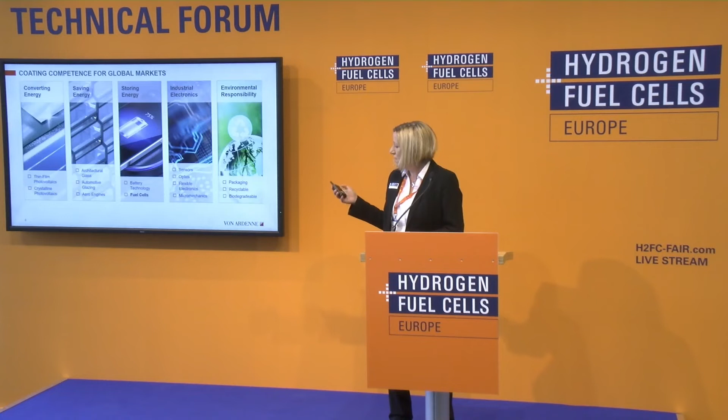My name is Susann Puppe. I'm active in the field of fuel cell and hydrogen applications for several years now, being responsible for sales and business development for von Ardenne. Today I want to give you an introduction into von Ardenne and its industrial equipment solutions and thin film coatings for fuel cell applications.

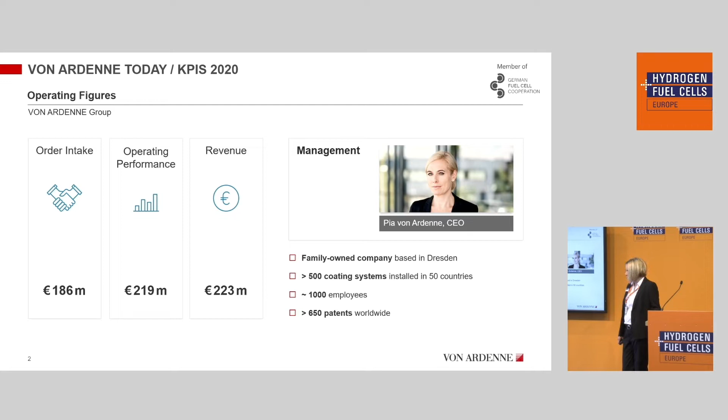The global network of von Ardenne is basically consisting of sales and service subsidiaries located in our major markets or close to key customer sites for fulfilling our service promise. So far, we have sold more than 500 coating systems installed in over 50 countries. We have an export quote of roughly 90–95%.

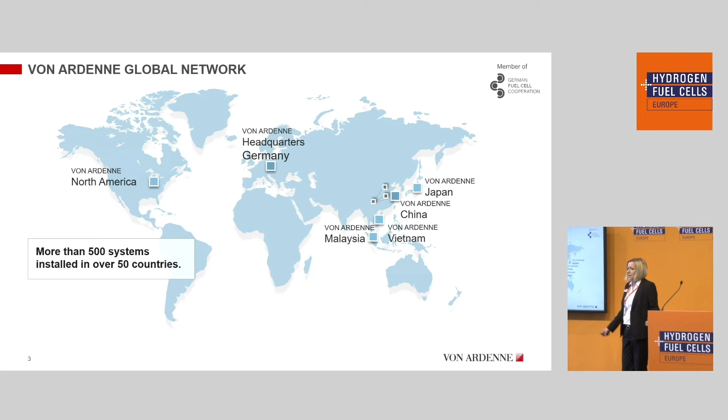So, what exactly are we doing? We are a manufacturer of advanced vacuum coating systems with applications in a very broad range. Very thin coatings means coatings from 1 nanometer to few micrometers thickness, giving surfaces completely new functions. Could be conductive functions, can be passivation functions, decorative, anti-scratch. It's very diverse.

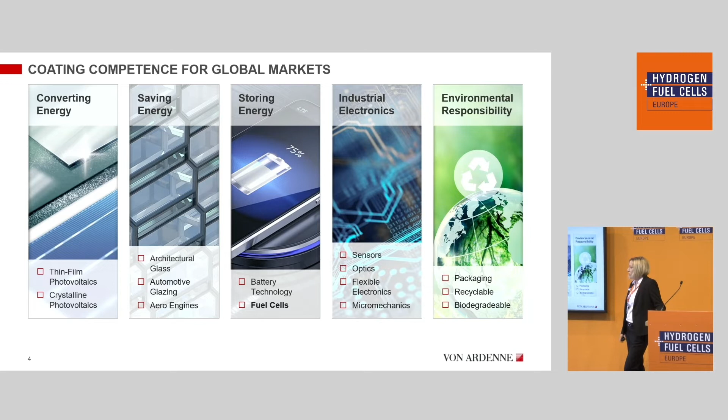That means for covering all these applications just shown, we of course can design and engineer machines that can handle all kinds of substrates. That can be 10 micrometers thick polymer foil only, up to 2 millimeters metal strip, can be very tiny substrates or glass panes up to a length of 6 meters. Applying these functional coatings, we are using 2 core technologies, which we have expertise in for decades now, which is the magnetron sputtering, and the other one is mainly the electron beam evaporation.

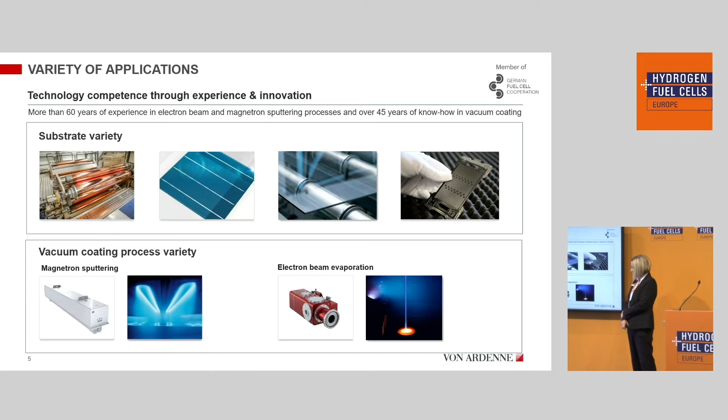We are configuring the machines to all kinds of needs. Could be demand for R&D purpose, for institutes, industrial labs, universities. We offer machines sized for pilot production, or here you can see a mass production machine, in this case a glass coater.

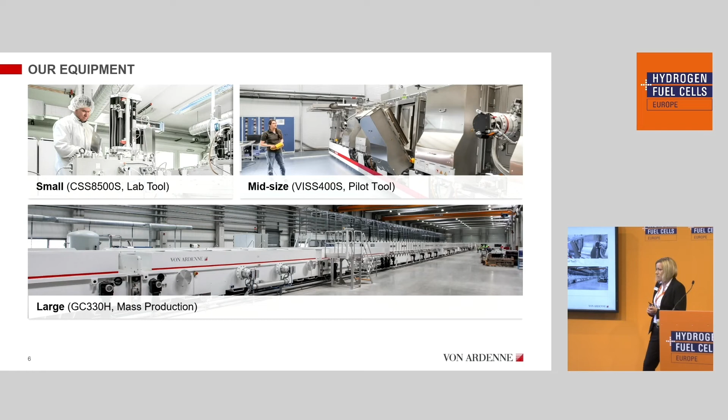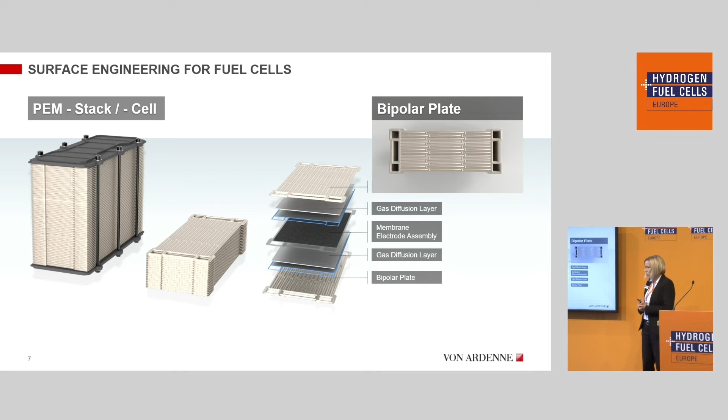Coming to fuel cell application and also for electrolysis, the functional coating our equipment is applying is dedicated to the bipolar plate. In a fuel cell stack, you have around 300 to 400 bipolar plates stacked, depending on the power output the stack in the end would need to perform. Of course, main discussions over the last years have been taken for the PEM fuel cell stack, especially for the metal bipolar plate, but latest trends also show very high interest in functional coatings on other components, also for the electrolysis application, for instance. We can also cover such requests.

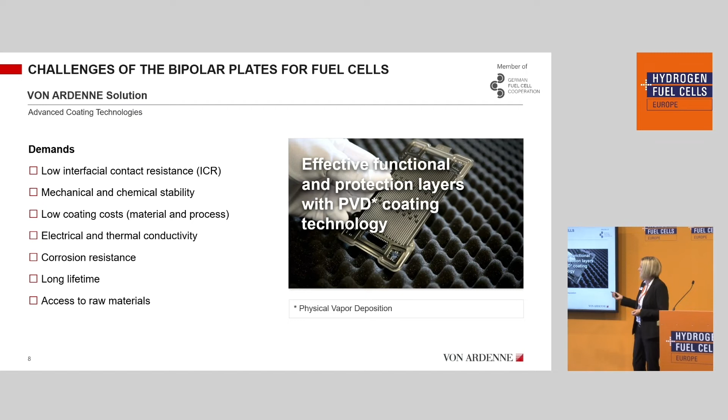So precisely the bipolar plate needs to fulfill certain demands of performance. We need high conductivity, we need mechanical stability, of course, low coating costs are expected, and corrosion resistance, and a long lifetime. Talking about the metal bipolar plate, we do need coatings to actually make the steel or titanium perform exactly these requirements. And this is where our PVD process is coming into the game.

Within our platform of machines, we do cover, again, all demands. We can serve your R&D purpose for fuel cell investigations, up to pilot production, or even high volume production. What is important is the takt time of production, especially for the mass production, and the cost of ownership or the coating costs in the end. With our machines and our solutions, you can easily reach these targets.

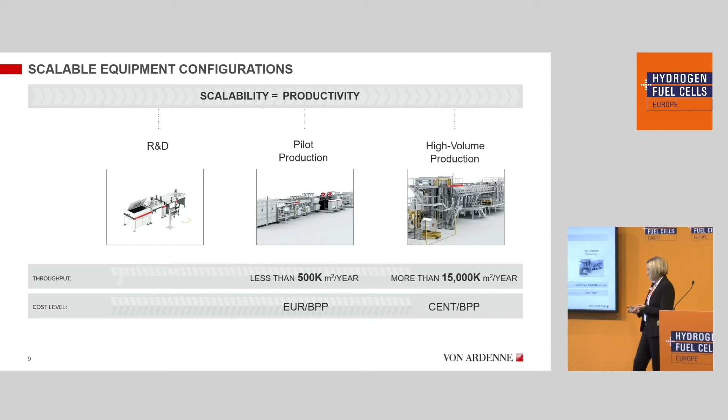Okay, our engineering capacity and coater platform actually gives us a chance to cover two positions in the typical value chain of a metal bipolar plate. It starts with a metal strip coil, of course. And if you're coating single sheets, meaning the readily welded bipolar plate, that's called post-coating. This is done by loading on carriers and then running through the coating process.

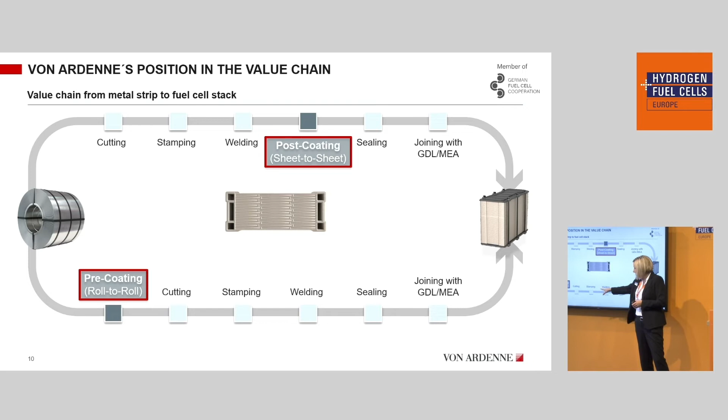Another approach, and basically the economically more feasible version in the long run, is a pre-coating option where you actually coat the coil, and the following steps in the value chain are cutting, stamping, welding afterwards. So now combining these two, the post-coating and the pre-coating of the substrates, and then our two core technologies, electron beam technology and sputtering, you have a very diverse field of machine concepts that are possible to cover your production amounts.

You can see here again R&D, metal strip batch coating, for instance. This is a mass production metal strip coater. These are just examples. It's a wide variety, and we are willing and very able to discuss your certain needs and adjust that.

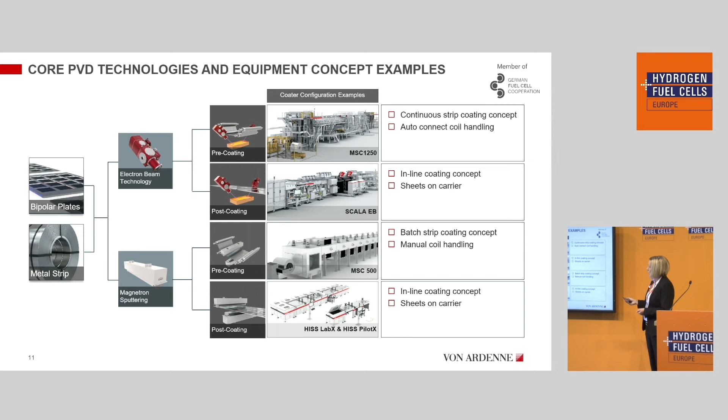Not only are we configuring machines in certain sizes separately, our machines are designed on a modular basis. We can install all kinds of processes you would need, be it any pre-treatment or any post-treatment. If you want to apply one layer or different materials in one row, we will just adapt that and put that in a row of components. And this same machine can actually be upgraded. If you decide to double your productivity later on, we will just apply more components.

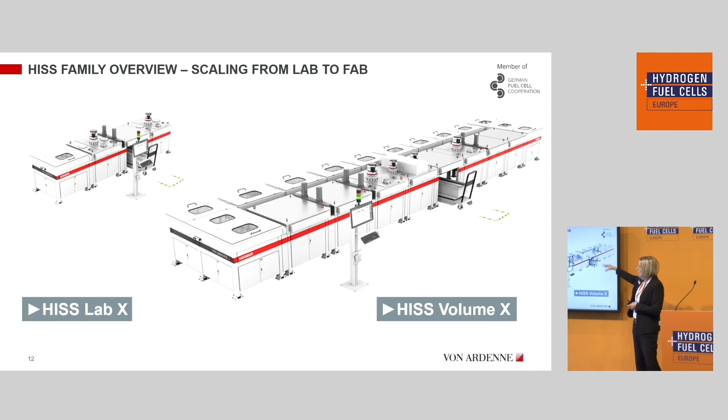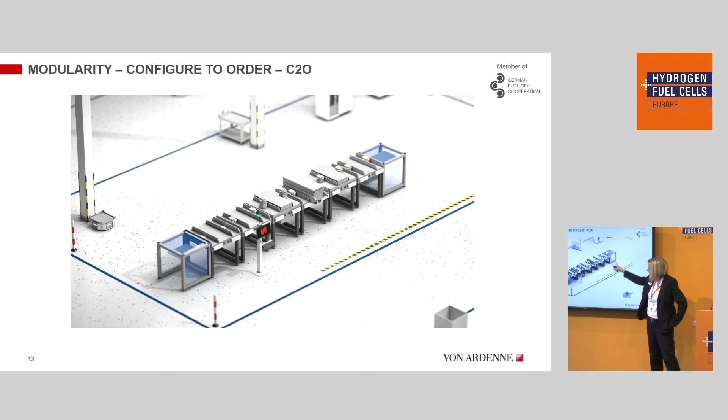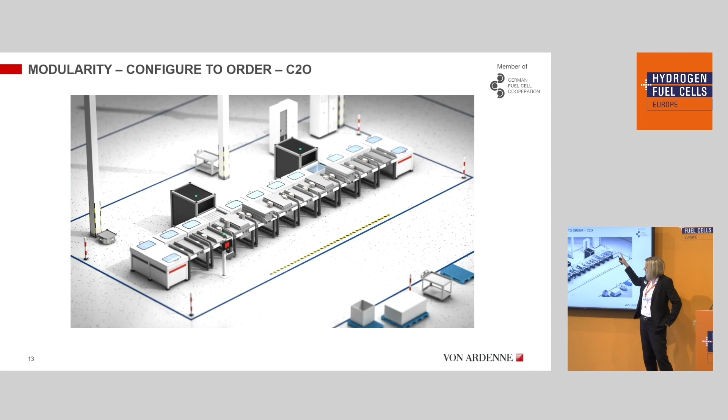So I will just show you a video on this one, it makes it more visible. For instance, you would start with just a one-ended, one-carrier machine, carriers running into the machine, being coated, and running back. So that would be the initial stage for R&D. Then you can combine different components and compartments, working maybe with a magazine solution, front and back end, and it's still the same machine, just extended. And the latest extension version would be fully automated for loading and unloading, plus a carrier return system. So this is complete mass production.

Also in our market, I think we are to a big part in the investigation and qualification phase, and therefore von Ardenne is able to do prototyping with you, do trials with you. We can also scale R&D topics up to industrial production. We do have a pool of lab machines in-house to cover your special requests. You can just approach us, and yeah, we are very willing to have discussions on new approaches.

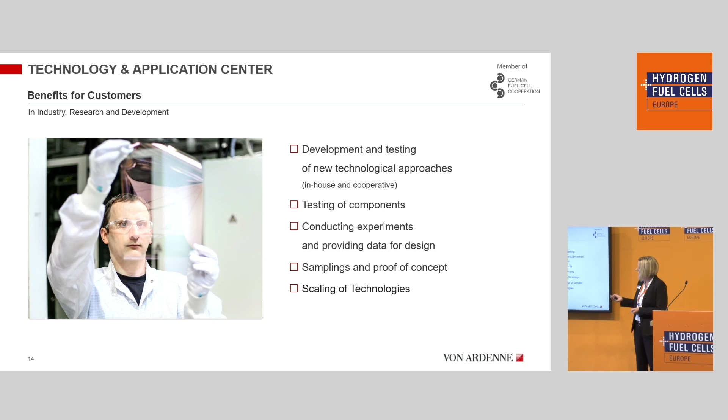Just in case you do not have your own developments on certain layers for performance, we did some investigations on a suitable layer stack that's possible for providing exactly the performance needed for the metal bipolar plate. This is a carbon-based layer stack. We have investigations with customers and also with institutes. It's comparable to the gold standard. Gold coating is basically the benchmark nowadays, but just commercially not feasible in the long run.